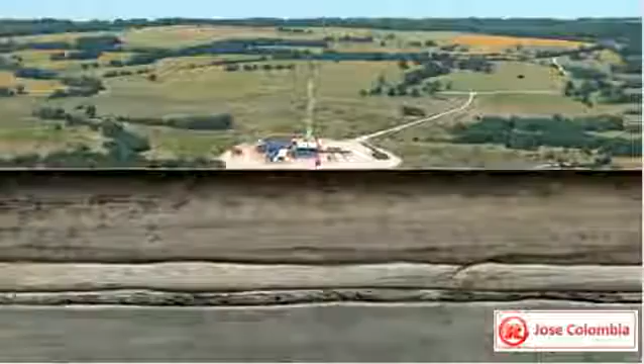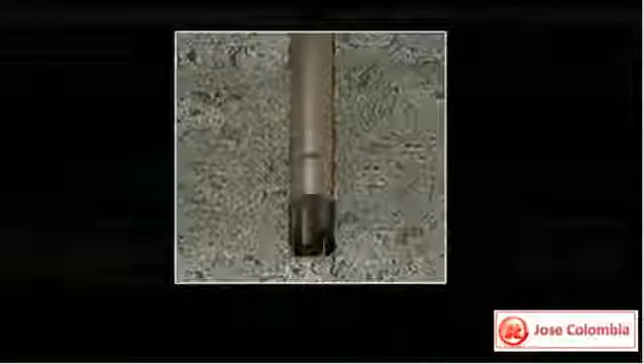Let's take a look at the horizontal drilling and stimulation processes that have made shale exploration so successful. A drill bit is mounted on the end of the drill pipe. As the bit grinds away, a mixture of water and additives, called mud, is pumped into the hole to cool the bit and flush the cuttings to the surface. The mud also cakes on the walls of the wellbore, keeping it intact.

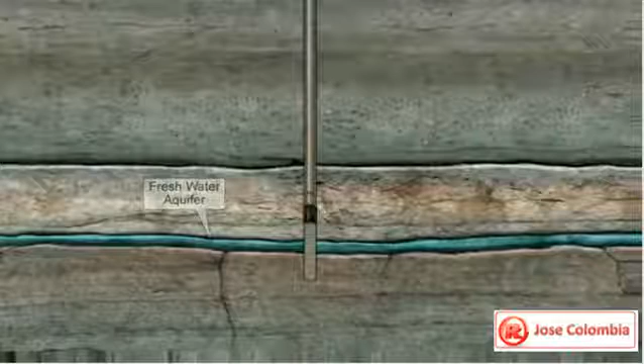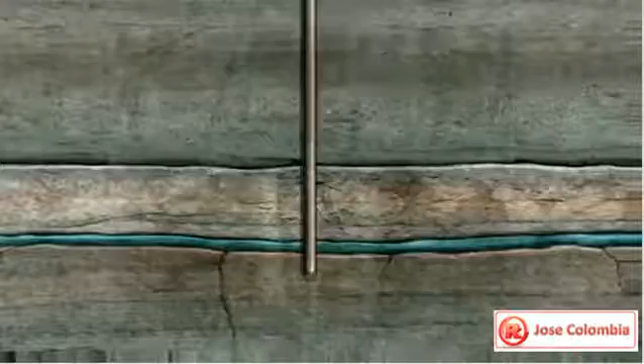Similar to a vertical well, the hole is drilled to just under the deepest fresh water near the surface. The drill pipe and bit are then removed. Surface casing is inserted into the drilled hole to isolate the fresh water zone and also serves as a foundation for the blowout preventer, a safety device that connects the rig to the wellbore.

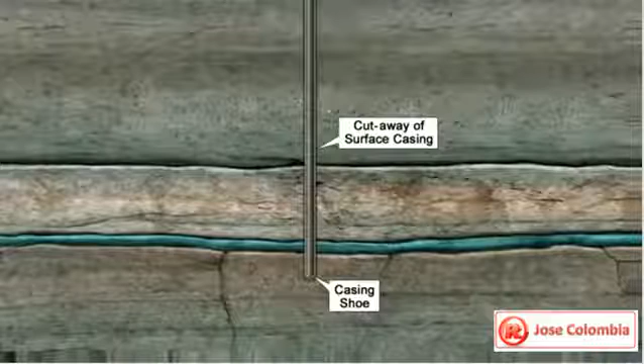Then, cement is pumped down the casing and out through the opening of the shoe at the bottom of the casing. It is then forced up between the casing and the hole, sealing off the wellbore from the fresh water. The cementing process prevents contamination of the freshwater aquifers.

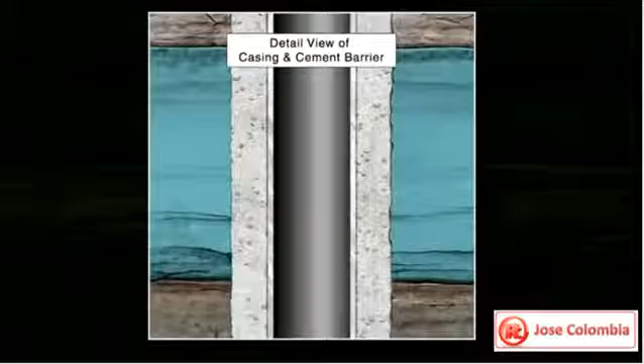The pipe and bit are lowered back down the hole to drill through the plug and cement, and continue the vertical section of the well to approximately 500 feet above the planned horizontal leg. This depth is called the kickoff point, where the curve will begin so the horizontal section can be drilled. Up to this point, the process is the same as drilling a vertical well.

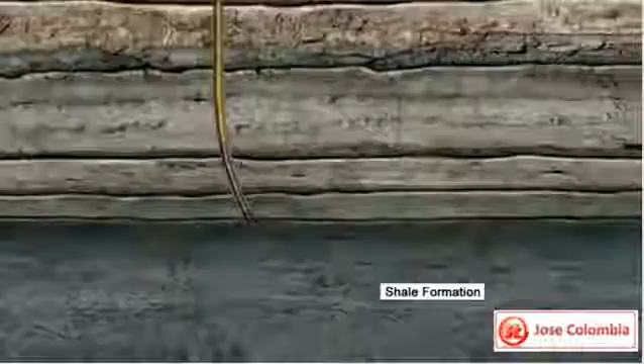Again, the pipe and bit are pulled out of the hole, and a downhole drilling motor with measurement while drilling instruments is lowered back into the hole to begin the angle building process. The distance to make the curve from the kickoff point to where the wellbore becomes horizontal is just under 1/4 mile. Once the curve is completed, drilling begins on the well's horizontal section, called the lateral.

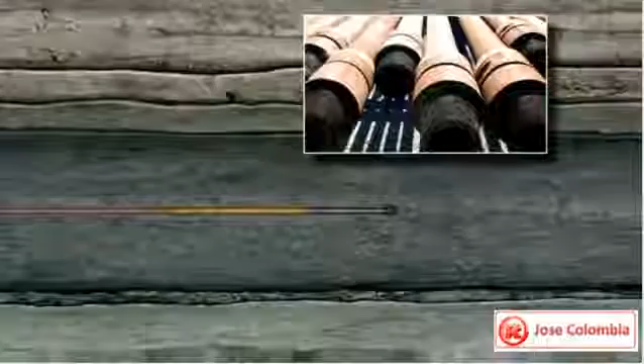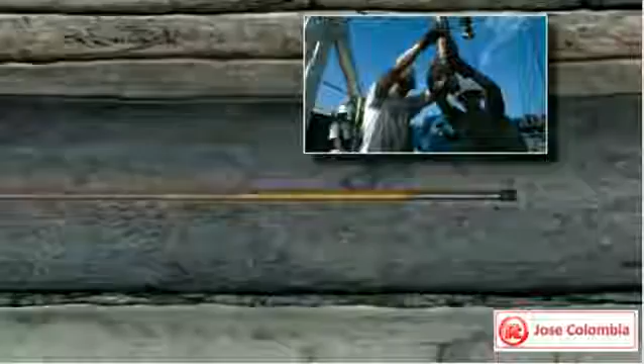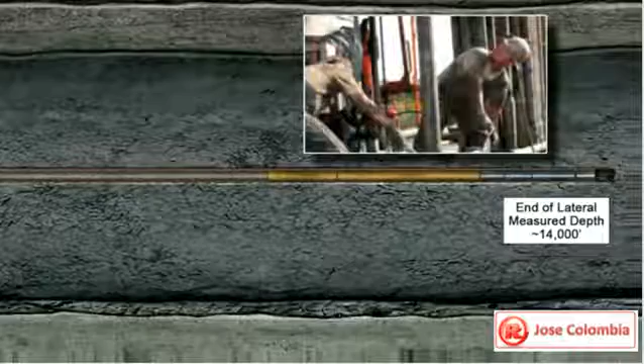The pipe used to drill the well measures 30 feet in length and weighs approximately 495 pounds each. It takes over 350 pieces of pipe weighing nearly 87 tons to drill a 10,500-foot well. At various stages of drilling, the pipe is taken out of the hole for tool and bit changes and put back in. This process is called tripping pipe. When the targeted distance is reached, the drill pipe and bit are removed from the wellbore one last time.

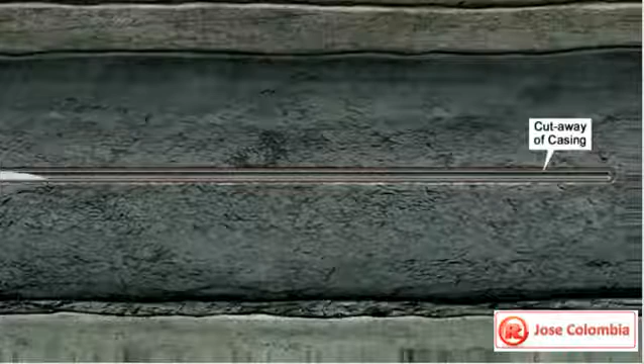Production casing is now inserted into the full length of the wellbore. Cement is again pumped down the casing and out through the hole in the casing shoe, forcing the cement up between the casing and the wall of the hole, filling the open space known as the annulus. Casing the well is a very important process because it permanently secures the wellbore and it prevents hydrocarbons and other fluids from seeping out into the formation as they are brought to the surface.

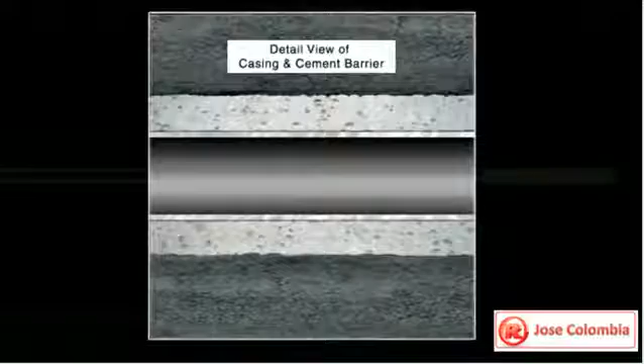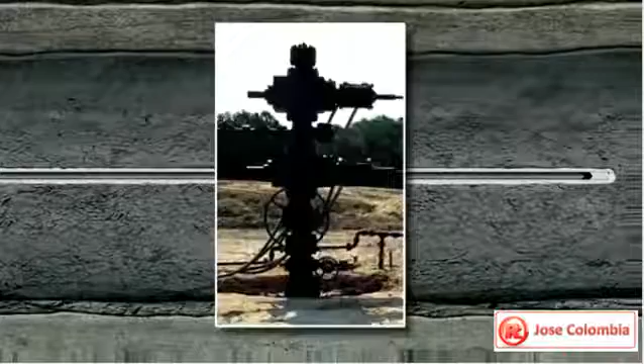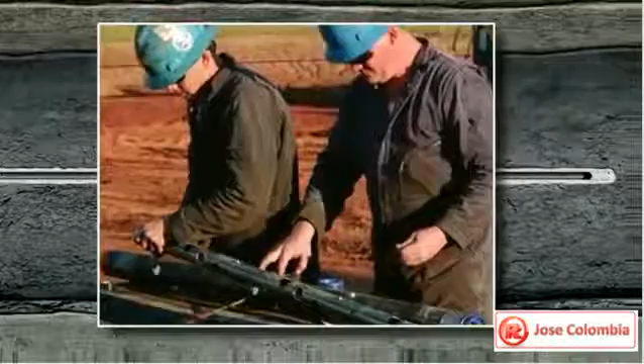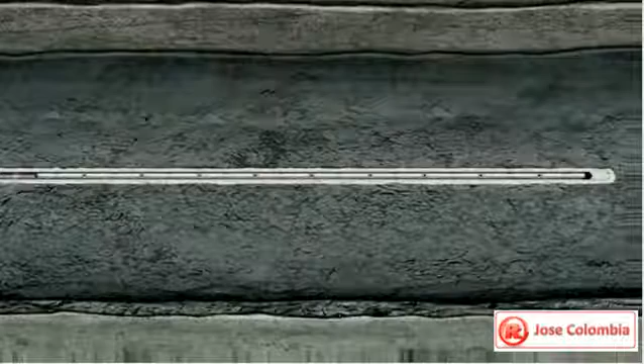At this point, the drilling rig is no longer needed. A temporary wellhead is installed and the location is prepared for the service crew who will perf, frack, and prepare the well for production. The first of these steps is to perf or perforate the casing. A perforating gun is lowered by wire line into the casing to the targeted section of the horizontal leg. An electrical current is sent down the wire line to the perf gun and sets off a charge that shoots small holes through the casing and cement, and out a short distance into the shale formation. The perf gun is then pulled out of the hole.

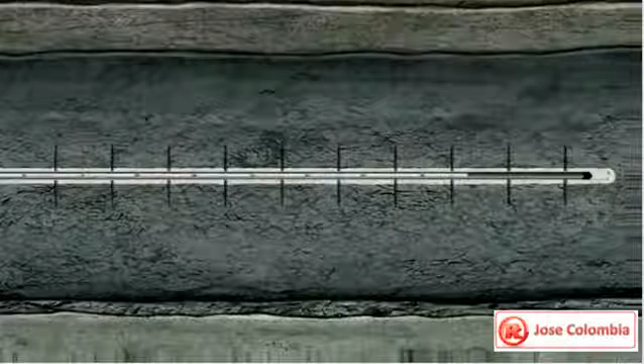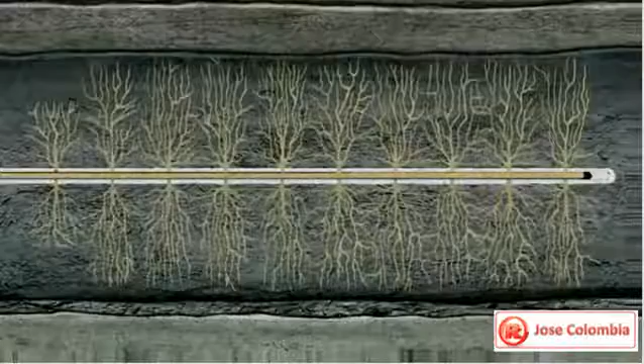Next, because the shale is tight or compressed, the well will have to be fracked. Known as hydraulic fracturing, this is a process where water, sand, and additives are pumped into the wellbore and down the casing under extremely high pressure. As the mixture is forced out through the perforations and into the surrounding rock, the pressure causes the shale to fracture. This creates a pathway connecting the reservoir to the well and allows the released gas to flow to the wellbore.

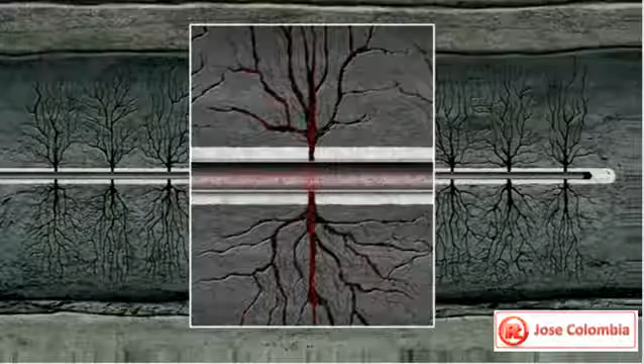Next, a temporary plug is placed at the heel or left side of the first stage frac. The plug closes off or isolates the perforated and fracked section of the wellbore so that the second stage section of the horizontal leg can be perforated and fracked. Tight reservoirs do not contain natural fractures and therefore cannot be produced economically without hydraulic fracturing. The permeability is increased by providing pathways through which gas can flow more easily.

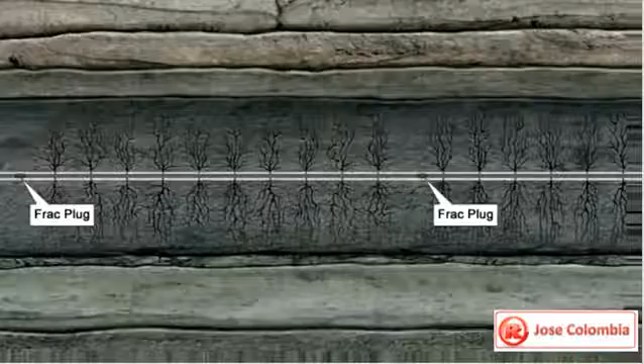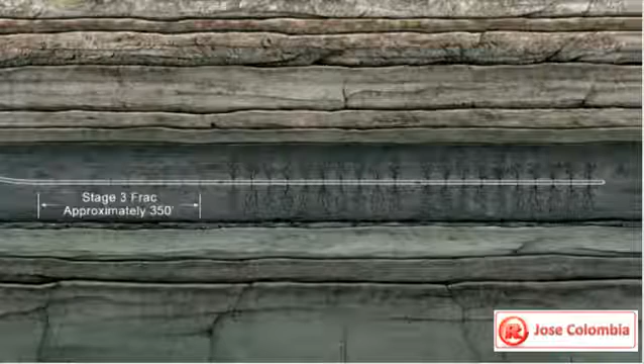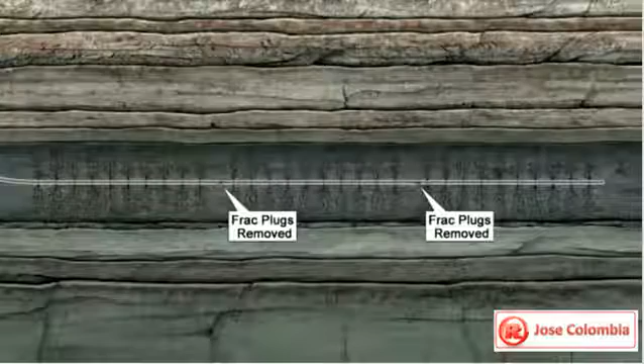With advancements in technology, multi-stage fracking has become the standard for tight gas reservoirs. This process of perfing and fracking can be repeated several times to cover the entire horizontal distance of the wellbore. Once fracking is completed, the plugs are drilled out, allowing the gas to flow up the wellbore.